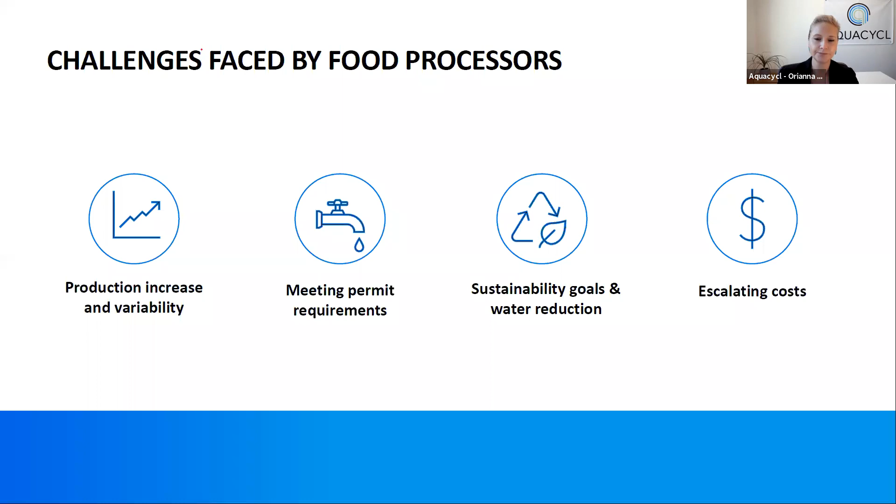So, the options that are available today: if you're in a municipality with a centralized treatment system and a robust sewerage system, often you can discharge directly to sewer. Sometimes that centralized treatment plant wants really ultra high strength wastewater from food and beverage, if there's an anaerobic digester in place, or a large flow that's more dilute coming from other areas - that food and beverage wastewater has a lot of critical nutrients, which is great for the centralized plant operation.

But in some cases, especially in small municipalities where the food and beverage operator may be discharging pretty significant volumes, the discharge to sewer can potentially cause problems to that centralized facility.

So then the next option is having to truck this wastewater from the production facility off either to another municipality or to an alternative land application. There are obviously costs involved in that - tipping fees, hauling fees, ESG costs, carbon footprint, et cetera. All of these things are going to add up, and there's not always redundancy - so if a hauling company goes away or a certain municipality is no longer receiving this type of waste, you're stuck, there's a change that has to be made.

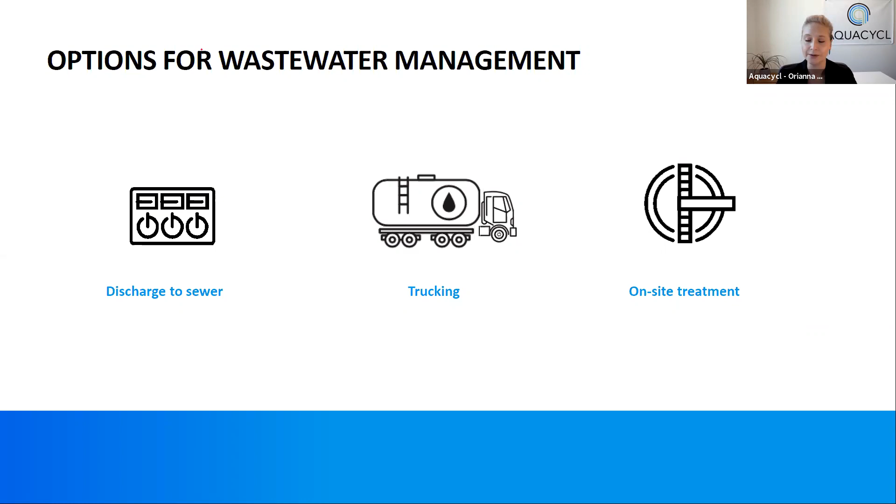And so that's going to drive an evaluation of on-site treatment - installing some level of treatment plant within your operations, directly at the discharge point. There is wastewater treatment, and potentially an opportunity for wastewater reuse as well, depending on where you are and what the goals are. But this is a major investment, and when it comes down to making these decisions and how you're going to move forward, there's a lot of things to take into account, and not the least of which is the technology - there are many technologies available within wastewater treatment.

Some technologies are newer, some have been around for decades and are well accepted but may be very costly. So when it comes down to selecting the right technology, whether you're doing on-site treatment or even industrial pretreatment while still discharging to sewer but decreasing the load, some considerations to keep in mind: what is your ultimate goal?

What do you want to do with that water? Is it really just that you want to reduce the cost and discharge? Or do you want to reuse that water to drive down overall operational costs in the long term? How clean do we need to get the water in both cases?

And then operational requirements: what are the restrictions relative to footprint and energy consumption? What would you want to do with energy recovery? Are you looking at waste treatment as an option to provide renewables on site?

What are the ultimate ESG goals? What are your carbon footprint goals? What are the water reuse goals, if any?

And then also within the organization or even locally plant by plant, what is the ultimate expansion plan? Are you going to be adding production lines? Are you going to be expanding the size of the facility or changing a product? All of these things are really going to drive technology decisions.

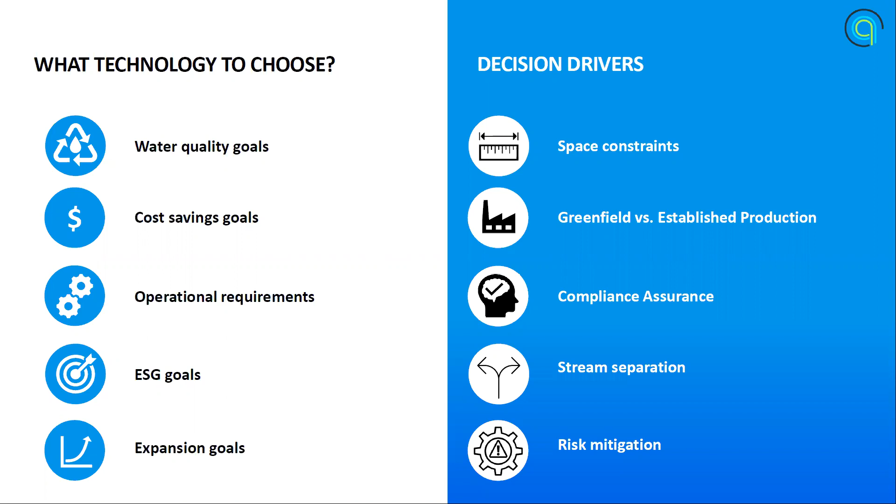All right, we still have votes coming in. I'll leave it open for another 15 seconds to get any of those last minute votes. Definitely interesting to see what you guys are saying. Great.

So the winner is permit compliance by a fairly wide margin, 56%, followed by escalating costs, treatment upsets, and production limitations. Thank you very much for that, and that really falls in line with what we're talking about today: a major driver being compliance, and then how do you drive down cost as you're meeting those compliance metrics?

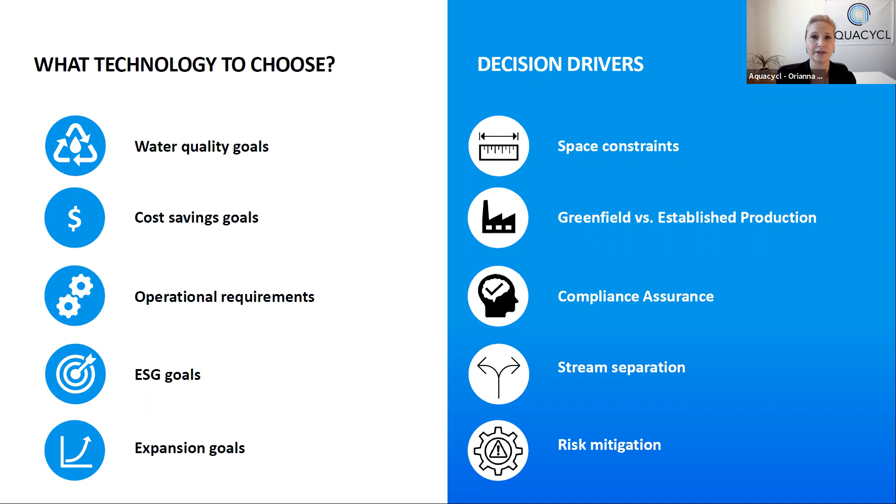So when we're talking about costs and compliance, that brings in a lot of vocabulary. In wastewater world, we like a lot of acronyms, so I'm going to go through a few that we're going to talk a lot about today. I apologize to the audience that knows this really well, but it's always occasionally good to have a refresher.

So when we're talking about those things that you're charged for in the wastewater space, what you're trying to ultimately reduce is your volume, because you're going to be charged by your total volume in a month, or your gallons per day on average, which is going to be metered out of your production facility.

You're also potentially going to be charged or surcharged for biochemical oxygen demand, or BOD. This is the regulated parameter across the board for how much soluble carbon is within your wastewater stream. BOD is literally the amount of oxygen that would be required for bacteria to breathe to completely break down all of the soluble organics in your wastewater, usually sugars, but there's also starches and other components in food and bev discharge.

So you're going to be charged by the pound in the US for BOD, or by the kilogram elsewhere, and that's a monthly bill. That can be sampled however frequently the city decides to come out and do that, whether they've got an inline sampling device, or they come out quarterly, monthly, or annually to grab a sample and say, okay, this is how much BOD is representative in that stream, and this is going to be your charge for the rest of the year, quarter, or month.

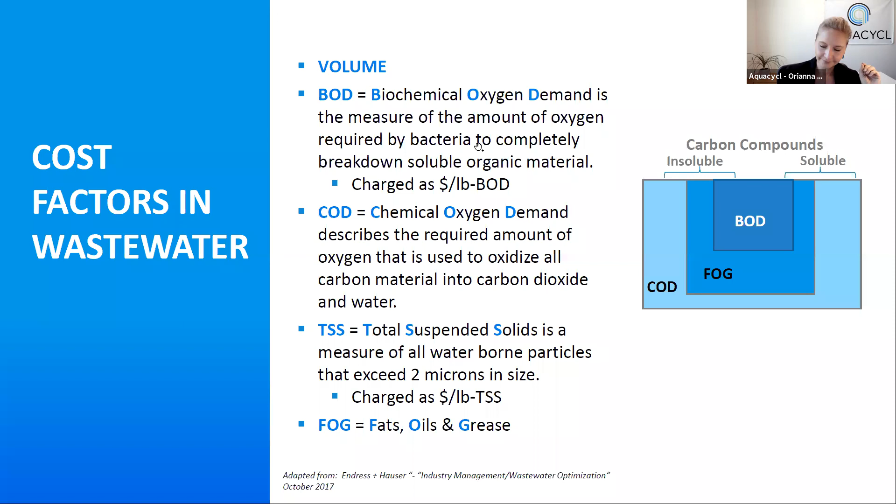So when it comes down to selecting a technology to deal with BOD, COD, TSS, and FOG, you've got a lot out there. And there are selection criteria that are going to define your choice: permit compliance and cost. And also reuse might be a factor in that.

When you're talking about achieving the highest effluent quality possible for reuse, you're always going to need some level of disinfection, tertiary treatment. It's usually going to involve a filter. You're going to need reverse osmosis, and then you have a very high quality effluent, which can be reused in various applications after full disinfection.

But before you get to that RO piece, you need some pre-treatment, and the technology selection can often be dependent on what level of COD or BOD you're generating in your process. So if you're looking at really low levels to begin with, filtration steps are going to be easy to integrate, easy to maintain, and low energy.

But as you start to increase in COD concentration, you're really moving now into biological technologies which can help remove that organic load. The DAF, dissolved air flotation, is really the tried and true method for removing FOG, fats, oils, and grease. Then some of these other technologies can come in after that to further decrease your COD, BOD loading, followed by a polishing step, which could get you to some reuse activities.

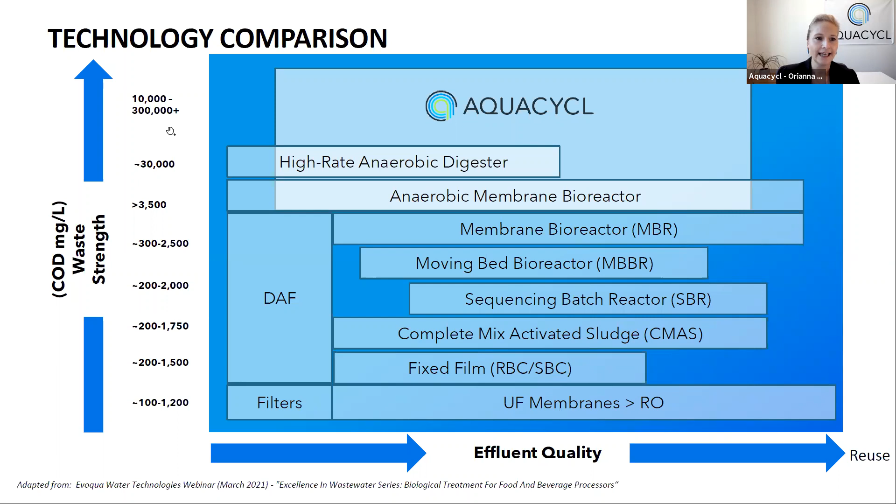And typically, everything is coming off of a production line. You've got maybe a collection sump or collection tank, so everything is mixing at that point, and then you're treating your mixed wastewater, or sending it off to the sewer or whatever strategy you've got for managing it. So when you're mixing that 80% of not-so-dirty water with 20% highly concentrated COD, you're elevating the amount of volume that has to be treated.

But what if you just take that 20% and treat it? You're not decreasing the volume of discharge necessarily — of course it's still 100% of the volume — but you're only having to focus on specific treatment of the most concentrated streams, which lead to your highest BOD, TSS, and FOG surcharges. So just something to think about, especially on greenfield projects. If you start thinking about side streaming, how to optimize CIP processes or capture within the facility to do an industrial pretreatment on that 20%, you can really reduce your overall cost and footprint and headache relative to wastewater management.

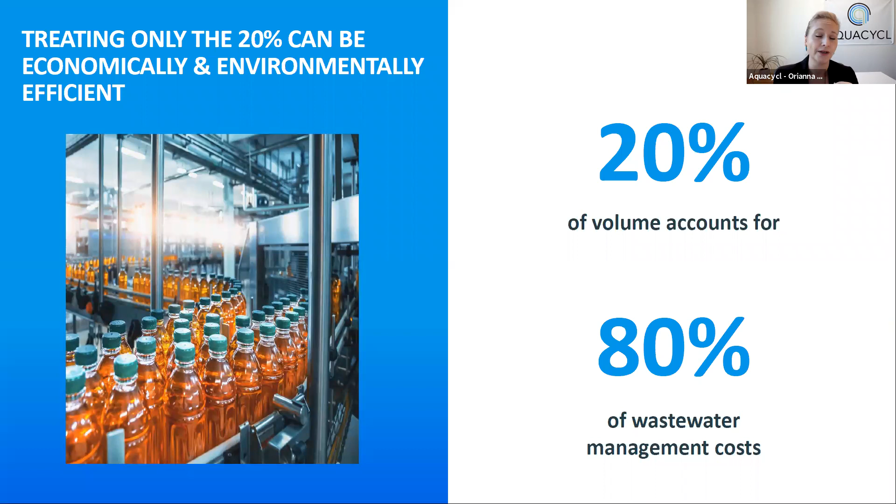So that's one of the things that we do. We focus on those concentrates because we're able to really work in that very high range of COD discharge, acting primarily as industrial pretreatment in a pretty small footprint. We can take that 20% down to a level where when you're mixing it with the rest of your 80% volume flow, the dilution factor really makes a huge difference, and your surcharges go way down, 30 to 50% in some cases.

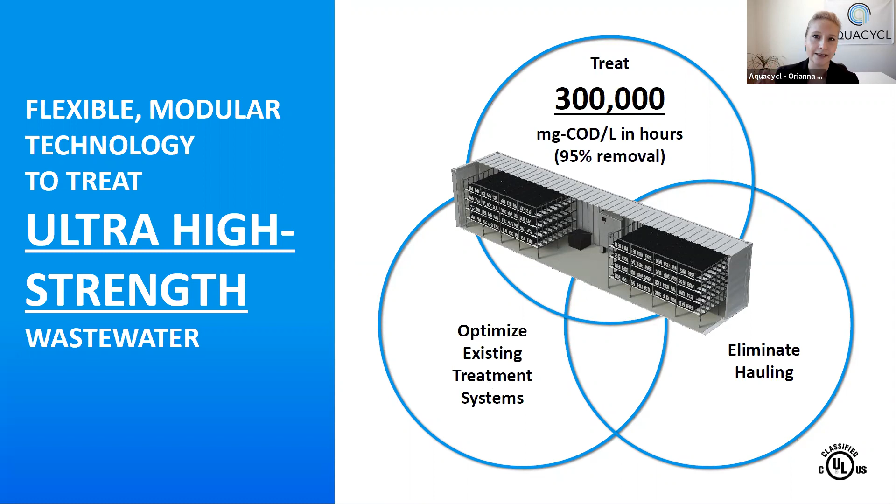And so this is a plug and play technology that can retrofit into existing systems, whether you already have an anaerobic digester that you want to enhance performance on or increase capacity for. If you're hauling and you're already side streaming and you want to eliminate that hauling process, that's something we can help out with.

The other advantage to separating your high strength and low strength streams is that it also benefits those centralized treatment systems, which may be facing burdens and pushback on permits and increasing charges for those permits. You're still giving them the same volume of flow, so if there's a centralized facility focused on reuse, they still get the water, but you're taking out a lot of that concentration. So that centralized treatment facility can also operate with less energy and less overall chemical addition to treat the same volume of water. It's a good cooperation.

Now, this isn't going to be a fit in all cases, but something potentially to keep in mind.

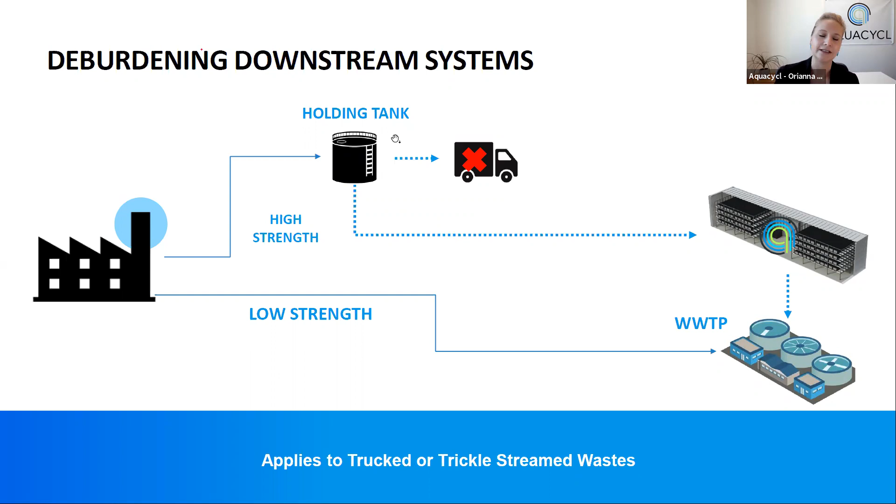Another thing to keep in mind is the optimization of existing digesters. Digester systems work great, but they age, and often if you're increasing your production capacity, but your digester was sized for production levels from 10 years ago, it may be having a tough time keeping up.

So instead of revamping the whole digester, you can add us as a pre-treatment step. We take out total sulfur, so you eliminate the sulfide issues that are often common with anaerobic digestion. In addition, we'll take out some of that COD and convert it from sugars ultimately to a volatile fatty acid profile that enhances biogas production.

So we do two things: we take out that sulfide, and we enhance the flow that can come through the digester, as well as the biogas conversion efficiency, because the feedstock is now normalized to something that ADs really like.

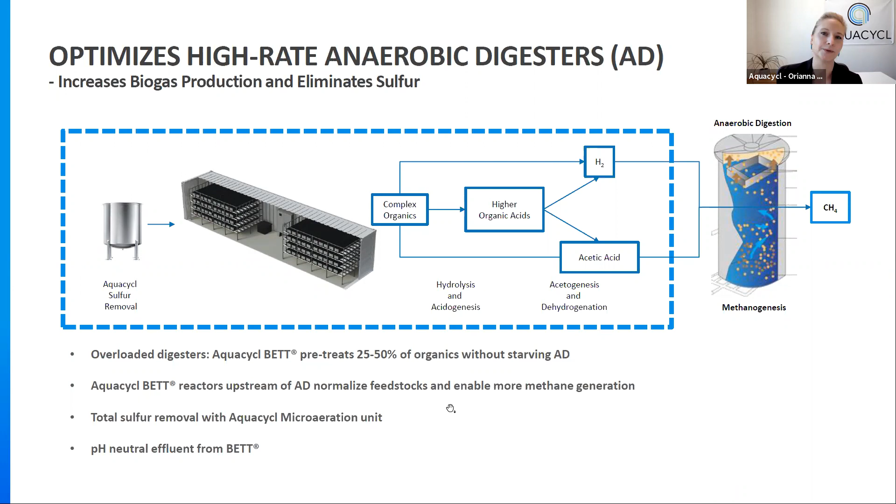We've been validating how this technology works across different parts of the food and beverage industry, as well as other parts of the wastewater industry, including swine farms, residential sewage, and military applications. Most of the work we've done in food and beverage looks at bottling, breweries, and confection.

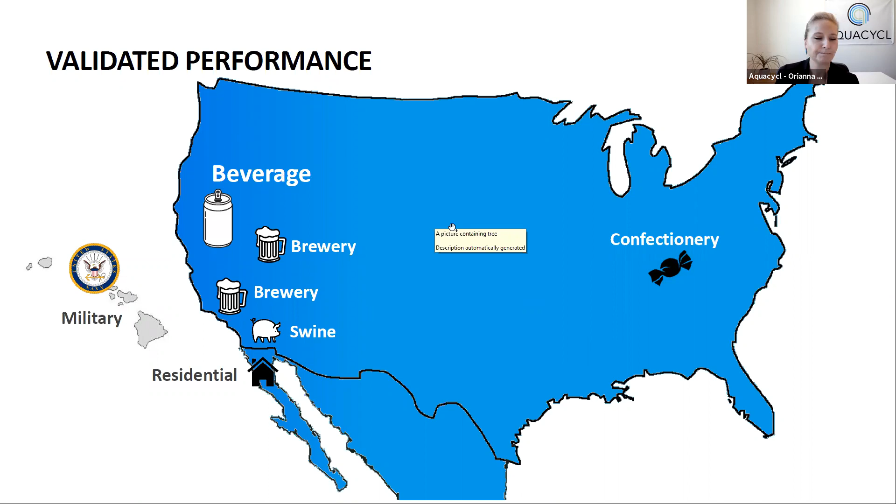What we aim to do is provide a plug and play system that can survive well in these variable production environments. We provide real-time monitoring and remote controls, so you don't need a full-time operator to have us there. And we provide a treatment service with guaranteed compliance, all scoped out in the scope of work.

Our target is to save our customers anywhere from 20 to 60% against what they're paying now.

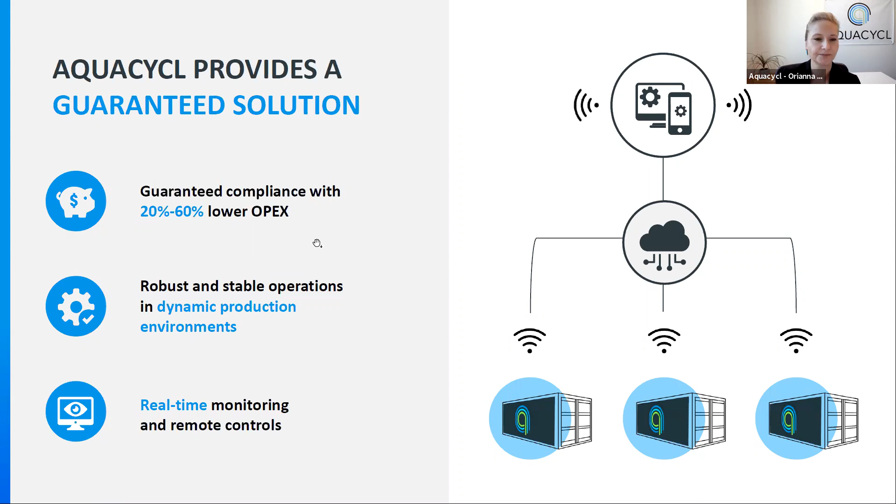So how the technology works: it's a bioelectrochemical treatment technology, and it's literally a little black box. It's an anaerobic process. We're using naturally existing bacteria already present in the wastewater, or sourced locally from your operational environment. We bring those bacteria into our BETT reactors, and they start to form biofilms or fixed films on the internal surfaces inside each one of these units.

What they do is start using these surfaces as a way to respire or breathe, and in that process they give up electrons. We move those electrons across a circuit, producing DC power. Sometimes we generate enough power to be a little bit net energy positive, but certainly enough to run ourselves.

The relationship between electricity production and treatment rate is such that the more electricity we generate, the faster we make these bacteria breathe, and therefore the faster they eat. So more electricity actually means a faster treatment rate. That's a little different from anaerobic digestion, because we're not trying to grow bacteria, we're trying to maintain bacteria at the highest metabolic rate possible.

It's a similar concept to a high rate anaerobic digester, but a very different microbial metabolism, because we're not making methane, we're making direct power. So we operate at a very different efficiency scale than digesters do.

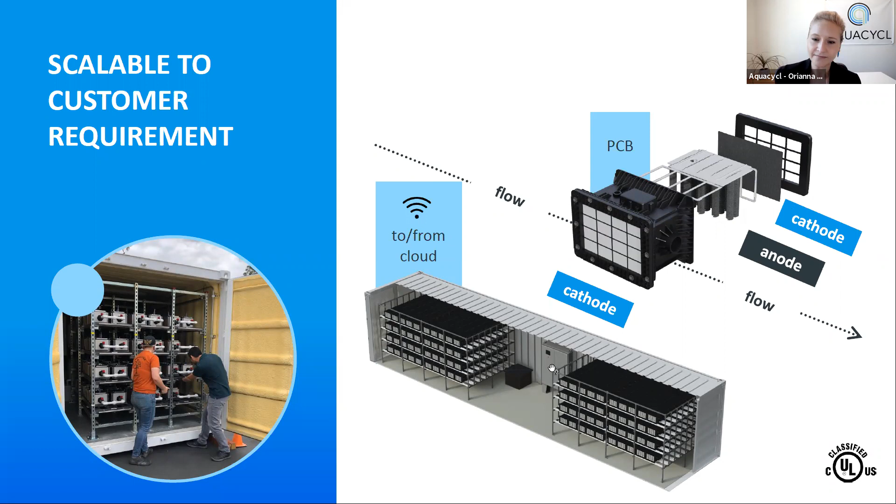Just to share some stories we've put together, case studies working in a commercial environment: specifically one treating a confectionery stream. In this particular case, there was a side stream already in place that was being hauled off site because it could not discharge into the existing treatment facility, due to too much sugar.

The production variability was quite high, ranging anywhere from 30,000 to 350,000 milligrams per liter of COD, spanning within a 24-hour period. The goal with this particular client was to demonstrate that the technology can handle these variabilities, stay within their corporate sustainability goals, and save some costs relative to hauling. In addition, this provided security in terms of always having a solution for treating these waste streams, not dependent on a particular hauling company.

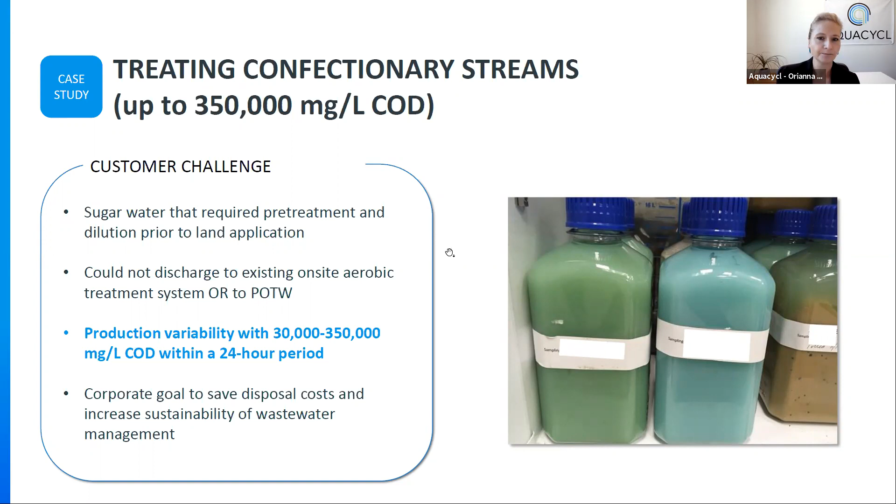So we set up a small unit, which is a fraction of the size we'd use for a standard unit. Inside this container, we only had 12 of our reactors. Our BETT units are only about the size of a standard car battery, so we only needed 12 of these.

The actual treatment footprint inside this container is about the size of a Fiat, with a 4-hour hydraulic residence time. We're looking at overall COD removal across the span of operations, trying to make sure we're not producing a lot of excess secondary biomass, which is another hauling issue, and also quantifying the amount of energy being recovered from the system.

What we found is we could actually remove up to 50,000 milligrams per liter of COD in a 4-hour residence time, which is higher than what you feed to most conventional anaerobic digesters. In terms of secondary sludge production, less than 1% of that carbon, which was treated and removed, was actually converted into secondary biomass that left the system.

In terms of energy recovery, we were able to produce about just under 2 kilowatt hours per kilogram of COD that we treated. To put that into context, a methane digester is about 1.2 or 1 kilowatt hours per kilogram of COD treated. For this particular application, that translated into about 22 kilowatt hours a day coming out of our little Fiat, treating this particular waste stream.

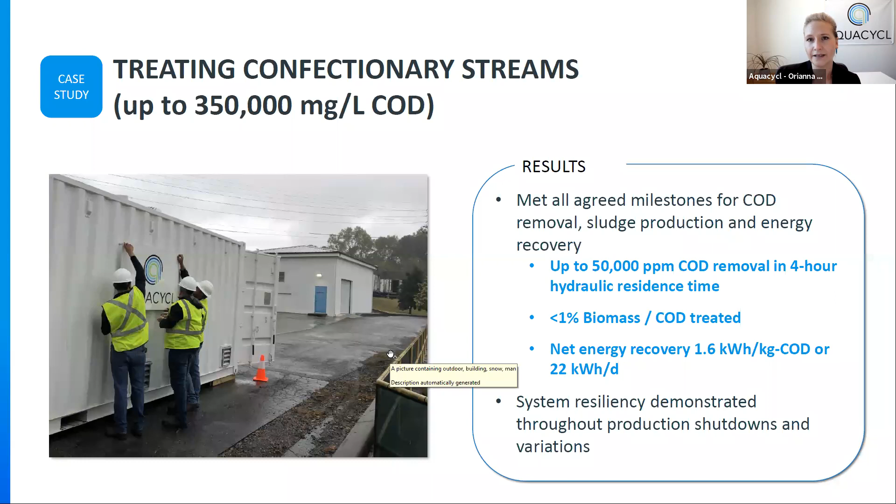So now if you think about scaling this up at full scale, say around 10,000 gallons a day, this would take four of our fully packed containers, and we could net generate about 2,000 kilowatt hours a day, removing roughly 80 to 90% of the incoming COD.

Now we've also evaluated what happens within breweries, and breweries are an interesting use case because many of the larger breweries already have a system employed. Anaerobic digestion has been a workhorse within this part of the industry and will certainly continue to be. But sometimes there is a particular brand or process which can generate these very high waste streams that could potentially be problematic in higher volumes going to that anaerobic digester.

And so that was the challenge with this particular customer. It was a very high fruit pulp application, lots and lots of sugar coming from that, so very high TSS and very high sugar. The COD starting here was about 120,000 milligrams per liter.

So the challenge was really understanding, one, is the volume they're producing of this waste stream going to impact the existing digester - and so they were in parallel doing this test. And two, can our technology help prevent the hauling of this wastewater, which was what was going on when we started this. And like many facilities, this is a seasonal product.

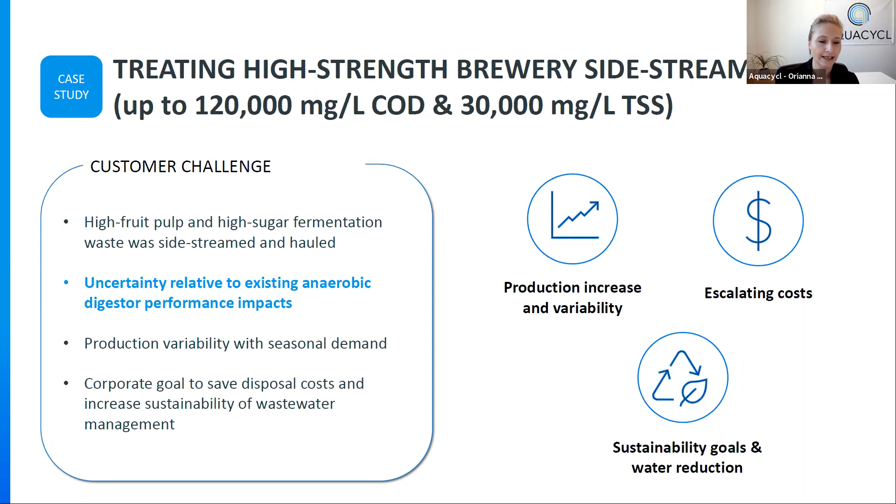So you're going to see a ramp up and ramp down in demand on this and production of this throughout the year. The overall goal here was to reduce costs, eliminate the hauling, and also provide some additional sustainability relative to wastewater management.

So we brought in our little demo - this is what the skid looks like. We can do this in a container or just like this under a shade structure. What we were showing in this case was removal up to 25,000 parts per million, starting with a lower concentrate than in confection, but we're still seeing very good removal rates in a very short period of time.

TSS was very high here. This was all organic TSS, and we did an 80% removal also within that same 4-hour period. The net energy recovery was a little bit lower than what we saw in confection - this is a more complex waste stream. But we did manage to hit all the goals there, basically industrial pretreatment ahead of the anaerobic digester.

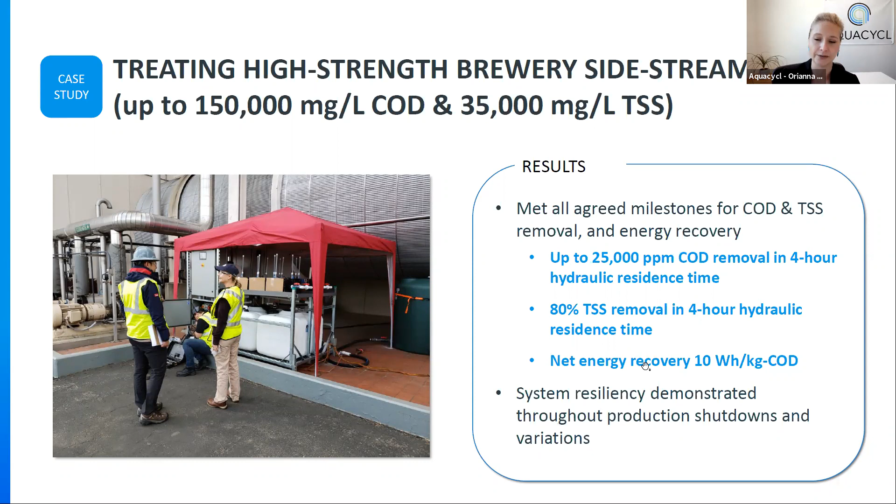And while you see variable rates in those case studies, it really reflects the concentration and composition of the wastewater that we're treating. So if we're looking across a span of different applications within food and beverage - confection, soft drinks, starch, sugar refineries, different types of brewery effluents - you've got a broad range of concentration and composition coming out of these production facilities, and that's going to impact the specific treatment rate, not only of our technology, but of every technology.

And so really understanding the variability - how often are you going to spike at 350,000 milligrams per liter? Is this a daily occurrence, a weekly occurrence, hourly occurrence - that's going to be a big driver in what it is that you install.

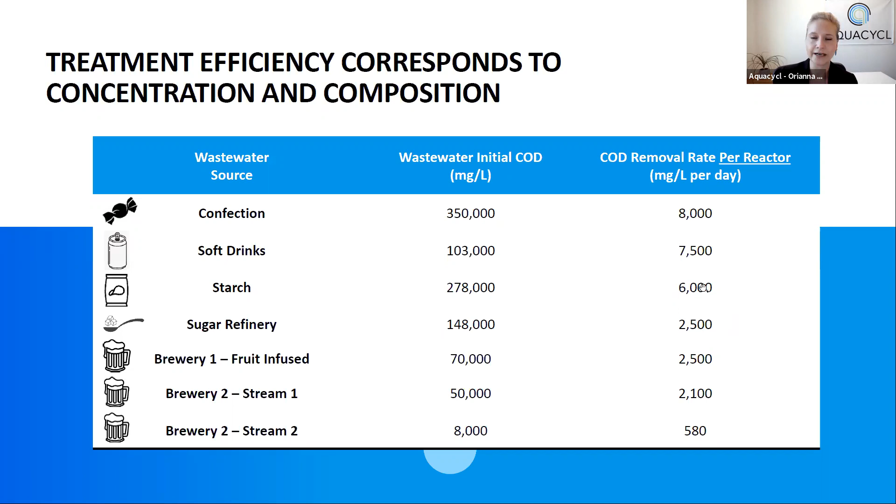And the same is true in all of these production units. You need to be able to plan for the worst, hope for the best, but you don't want to poison the system you install by either undersizing it or installing the wrong technology that won't be able to keep up with the spikes and/or recover from plant shutdowns, etc., which is another challenge in a lot of biological treatment technologies.

So if we think about the comparison between biological treatment technologies, specifically—and this is very general—we're talking activated sludge, which is the workhorse in aerobic treatment, conventional anaerobic digestion, that multi-day methane production under batch conditions, and then our system.

We are able to provide much lower sludge production, so your secondary biomass that you have to manage is reduced significantly. In terms of energy recovery, if we're just crossing the same load removal across all different technologies here...

The energy consumed in activated sludge is really high. You have to force air into water to grow this biomass, and then that biomass, as it's growing, is consuming all of that BOD and COD. But you always have to have a very consistent aeration plan, and when you have a really variable waste stream, that becomes difficult to regulate effectively.

So then you may want to go into a more anaerobic approach, where the fluctuations are still going to have an impact, but you have a longer residence time to absorb that impact. The energy consumed is going to be lower, and you're actually going to recover some energy in the process with anaerobic digestion—that's as methane.

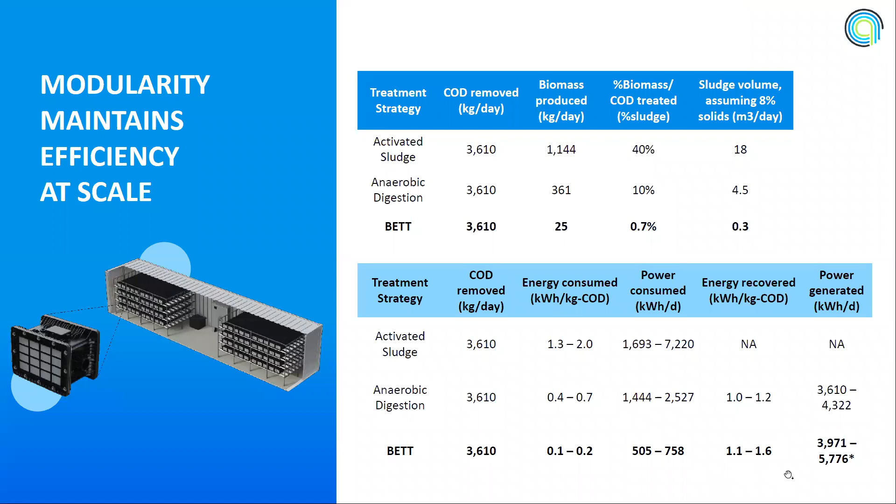So that's AD, reported in a lot of different publications and journals. With us, we're falling right in that very same range. We're doing a direct conversion, or direct conversion into DC power, bypassing the biogas purification step and the cogeneration step. But you do have to install a battery pack, and there's another level of permitting and complications you have to consider in doing that.

We're running off of that battery pack, and to improve the efficiency in recovery, we don't want to convert from DC to AC. So it's best if we can use that DC power locally for charging stations, LED lighting, things like that. In terms of actual conversion efficiency of carbon waste into electrical potential, we're right on par with AD. But with both technologies, you have to consider how you're going to reuse that power, and what's the best use case for you — is it going to be AC steam boilers, or DC charging stations, LED lighting, etc.?

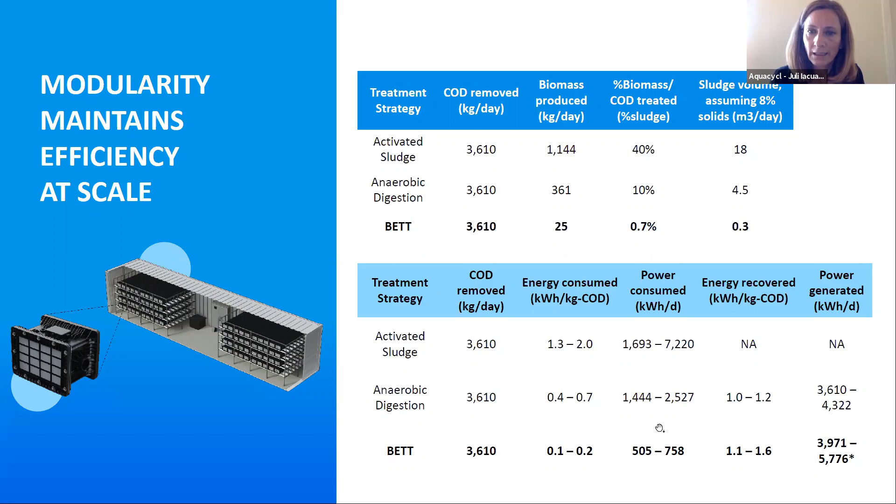We've also gotten a couple questions around the limits, so I'm going to combine two: any salinity or TDS limits per bed, and how does our system remove TSS from the wastewater? What are the TSS limits, and does it clog the bed?

In terms of TDS, dissolved solids conductivity, we love it — the saltier the better. We've actually tested up to seawater concentrations. We haven't tested brine yet, but when we have higher conductivity or higher salt concentrations, that actually makes our batteries perform better because we've got more electrolytic activity. We do not remove any salts — any TDS, like sodium chloride, that comes in is going to leave. We do handle some other soluble compounds like sulfates, taking out total sulfur. From a nitrogen perspective, we reduce total nitrogen by about 30%, and the nitrogen form that leaves our system is ammonium. So we don't take out salt, but it doesn't impact performance at all.

Relative to TSS, total suspended solids, we've tested up to 35,000 parts per million of TSS — pretty sludgy, pretty thick, kind of a melted milkshake consistency. We don't really have any problems there. Clogging is not an issue.

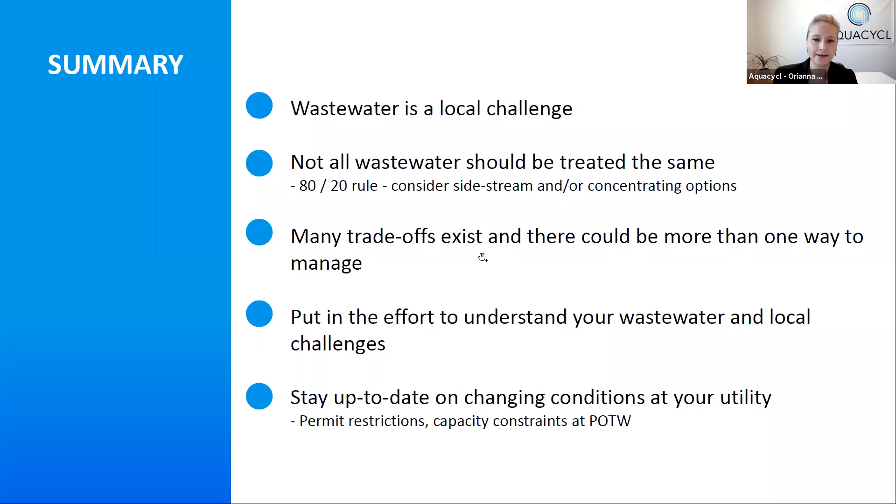One of the advantages of the design here is that we're doing real-time monitoring and controls, so we're doing real-time analysis on performance. We can catch any slow flow, potential clog, or decrease in performance on the energy recovery side really quickly, and we can troubleshoot and fix most of that stuff remotely.

In terms of regular maintenance, the periods that we need to be on site would be to remove those residual solids and make sure the pumps are in good condition, mostly preventative maintenance. With solids removal, if we have a really high TSS load, we'd need to be out there quarterly, at 35,000 parts per million or higher. If we're looking at a lower, more average range, around 500 to 1,000 milligrams per liter TSS, that removal happens annually.

And the nice thing about when we do that is, because of the modularity of how these things are operated, as we're doing service, maintenance, or any type of repair, we can bypass just those parts of the system that are showing an error or require that regular maintenance. 90% of the system stays running while we're doing that repair, so you're never fully down as we're doing either regular maintenance or repairs.

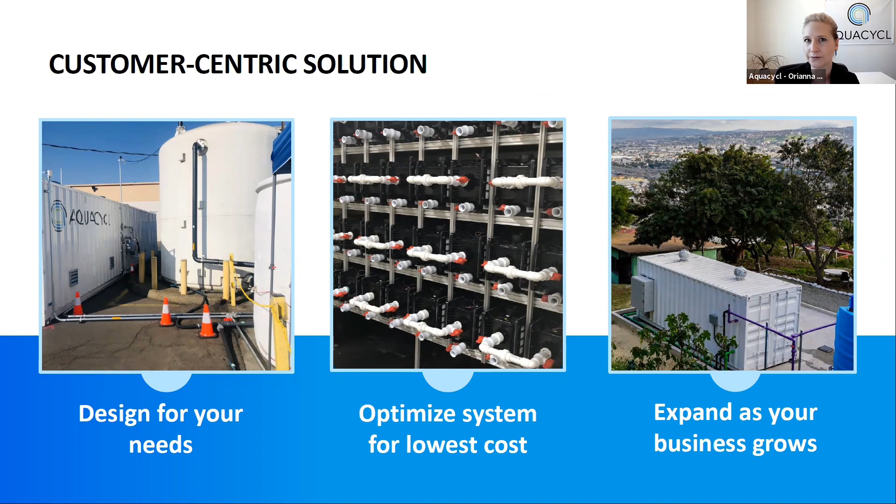So it does work well in a lot of those applications, and we've done some work with the U.S. Army on battlefield hospital waste and things like that relative to the pharma question. There needs to be more trials done to really prove it out in that industry.